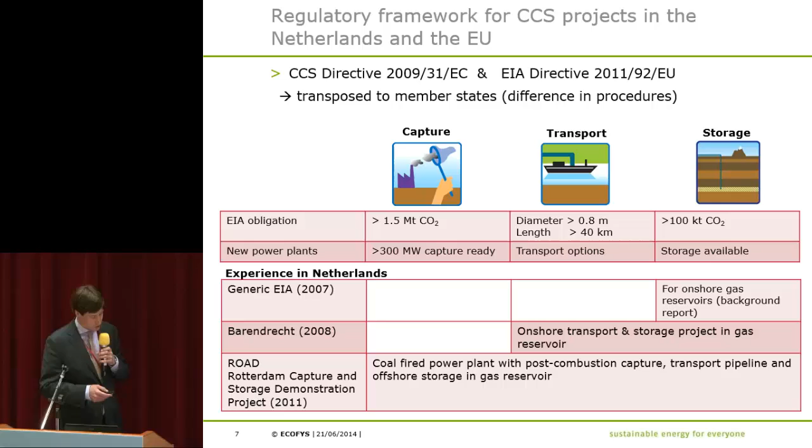And we have developed the ROAD project, which is still awaiting a final investment decision, hopefully by the end of this year, but probably it can also be later. And that will be a project storing CO2 coming from a coal-fired power plant into an offshore storage location. And for the whole chain, an environmental impact procedure has been done.

So this ROAD project, it's good to have a bit of insight there. It's a coal-fired power plant here in the Rotterdam area, which captures about 1 megaton of CO2 per year from a 1 gigawatt coal-fired power plant using post-combustion capture. Then it's transported by an offshore pipeline, mainly at pressures below 175 bars and below 80 degrees Celsius.

And it's storing it into an empty gas reservoir with a capacity of up to 35 megatons. The first reservoir that's going to be filled, if it goes ahead, is an 8 megaton reservoir, which is at 3,500 meters depth. An important thing to note is that the CO2 in the pipeline is being heated during transport, because when injecting into the empty gas reservoir, there's probably some phase transition due to the lower pressure in the bottom hole of the reservoir and the high pressure in the pipeline. So there can be extensive cooling effects during storage, so that's why the CO2 is being heated in the pipeline.

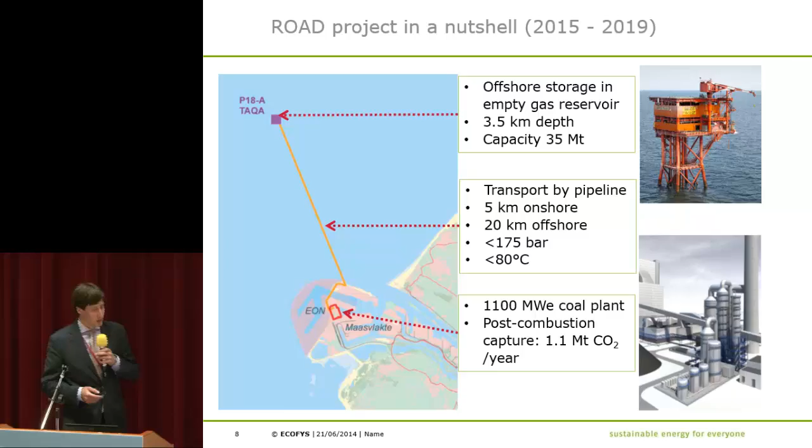So as I already told, for this project there has been a project EIA, so there has been an extensive environmental impact assessment for the project. But this project also triggered a strategic environmental assessment. And what it triggered for capture, in principle, was the location of choice. So in a strategic environmental assessment, they have to provide arguments why they have chosen the Rotterdam area to capture the CO2.

For transport, the thing that triggered the strategic environmental assessment was the fact that they crossed the dunes. In the Netherlands, that's really important, so they have to provide arguments why this happened and why this is the case, and what the best alternatives are. For storage, it was the location of choice that triggered this assessment. So when you put down a storage location in the Netherlands in a regional or spatial zoning plan, you will have to do a strategic environmental assessment.

And I also highlighted the green part here for the procedures. That is a new kind of procedure in the Netherlands, that they integrate the whole permitting process for these parts of the CCS chain. So to speed up the project, to speed up the permitting process, they integrated these parts into a one-stop permitting shop. That's how they call it in the Netherlands. And to align all the stakeholders from the governmental side, but also from the initiator side, to speed up the

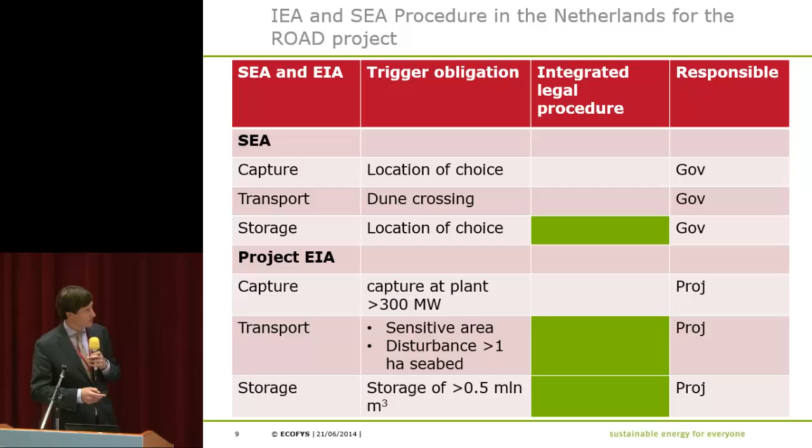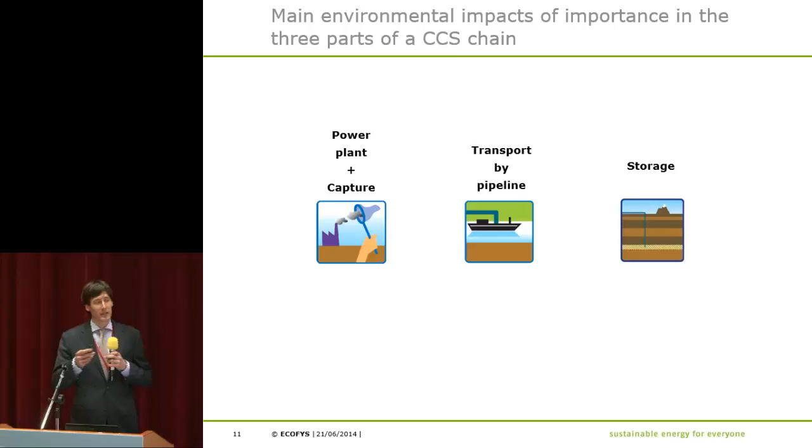So going a little bit from the regulatory side to more of the environmental impacts you could expect from the CCS project. We're going to highlight the first step of the chain. It doesn't mean that those are going to be showstoppers, but I just want to highlight what kind of important things should be worked on in your environmental impact assessment if you go to a CCS project.

So for instance, for power plants, I've reviewed environmental impact assessment procedures around the world for power plants, also for power plants with CCS. And you can see that a typical phase that is of importance for a CCS project is the operational phase. The most environmental impacts are in using the power plant, not in building the power plant or in demolishing the power plant. And that can be different compared to, for instance, transport and CO2 storage. So the focus is on the operational phase.

In the Netherlands, there's really a focus on emissions to air. Emissions to air are important, they should be balanced and minimized to the extent possible. And the environmental impact assessment should address how to optimize energy efficiency, use of waste heat, use of end-of-pipe emission control technologies like desulfurization or DeNOx, so reducing nitrogen oxide emissions, and how they deal with cooling water use and cooling water discharge. Those are the important aspects.

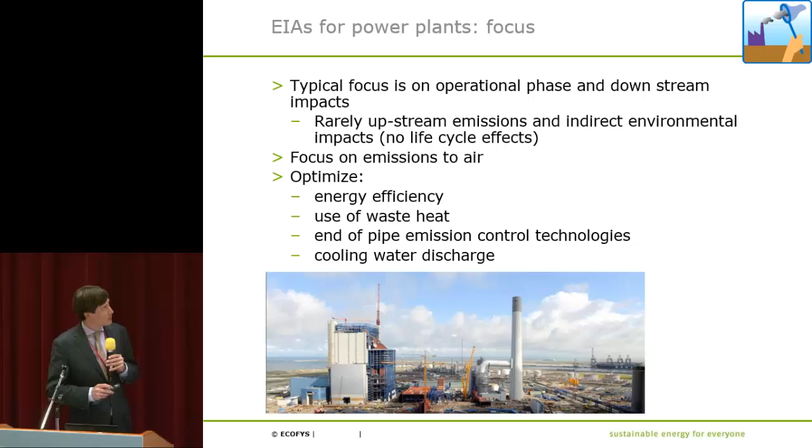So if you now look at a power plant with CO2 capture, how should we then address these items for a CCS project? Well, if you look at energy, for instance, we know that CO2 capture will cost energy, so your energy consumption per kilowatt hour of produced power goes up. So this is an important aspect to be covered in the

procedure. Emissions to air also are certainly affected by CO2 capture. Predominantly by post-combustion capture, you will reduce some emissions to the air, I will show in a later slide, but you also increase some other emissions per kilowatt hour to the air. So you have to balance what kind of level you want in terms of emissions to the air and find acceptable from a permitting perspective.

In terms of soil and water, the capture plant also uses water, so the water consumption is affected. Waste and byproduct formation is important. Certainly with post-combustion capture you will have waste formation due to the capture plant. And an important part of the environmental impact assessment should also address how you deal with this waste.

Resource consumption: next to primary energy you consume during capture of CO2, we also consume other resources like the solvent itself and other products you need to prepare the capture process. The thing not often addressed is also external safety, so storage of chemicals and, for instance, high purity oxygen if you go to oxyfuel firing. You should address that also in the environmental impact assessment.

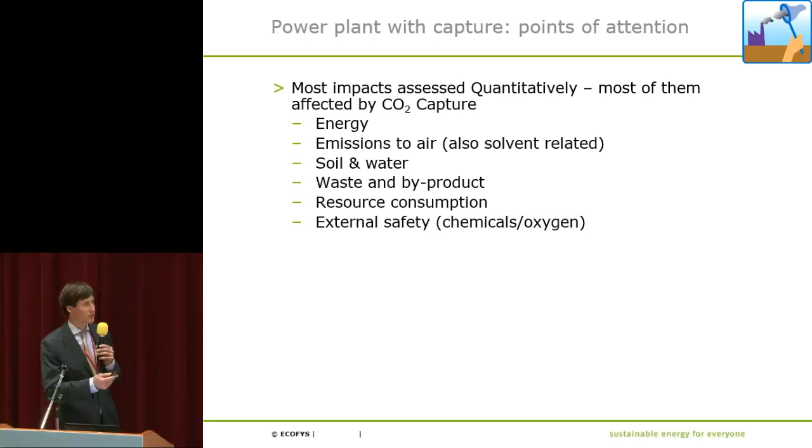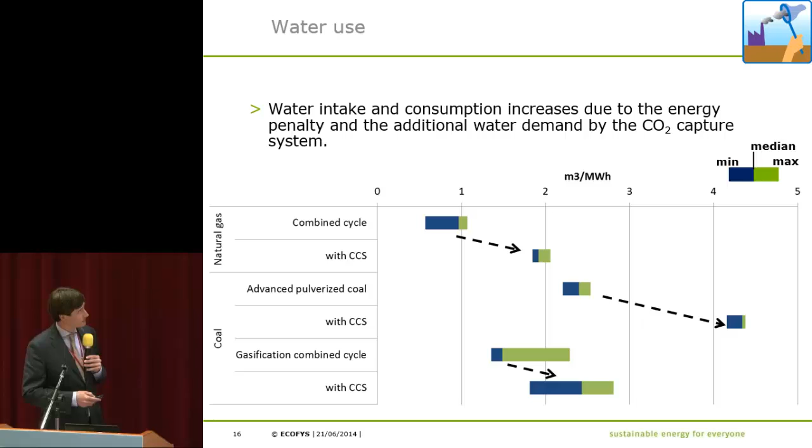So summarizing this in one slide is that primary energy per kilowatt hour goes up, CO2 goes down. Other emissions to air might be going up and down. It depends on how you arrange your flue gas cleaning and how you arrange the technology. It differs, for instance, between oxy-fuel firing and the gasification process.

Emissions to soil and water, that's really also difficult. It also goes up and down, but mostly you have more emissions going into your water streams, but obviously depending on how you equip your technology to clean that. Waste and byproduct often goes up, resource consumption goes up, and because of storing more chemicals on site, external safety is a bit affected.

One thing to mention for emissions to air, not in my previous slide, is that for post-combustion capture, the solvent emissions and solvent degradation products are also a point of attention that is being addressed in the Dutch environmental impact assessment. For instance, the Dutch had to adapt the legislation for emission of the solvent used there and set a level that was acceptable. So that's where also new legislation comes into play.

Summarizing it for the environmental impact assessment, we can say that the methods and tools used to measure the environmental impacts, but also to assess beforehand the environmental impacts, seem to be available. However, the exact emission profile, so whether the emissions go up and down and to what extent, is not yet known. So really monitoring is of essence, certainly with the demonstration and pilot plants.

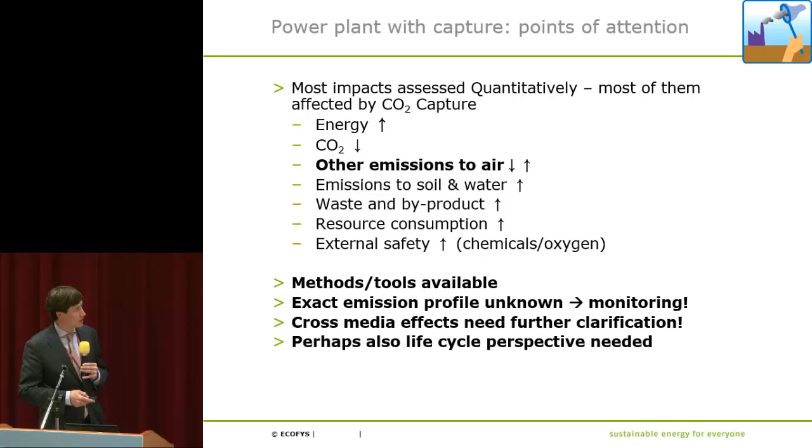And although not typically used in an environmental impact assessment, the life cycle perspective can provide some insights. So within the Dutch program, we've looked at the life cycle perspective for, in this case, a gas-fired power plant. And we looked at these stages of the whole life cycle, going from fuel extraction, in this case natural gas, to the storage of the CO2. And we looked at 18 environmental impact categories.

And from the literature, we know that for a certain environmental impact, there are certain environmental damage costs. So we applied damage costs to these environmental impacts. And then we calculated over the whole life cycle whether it would be a net benefit or not to equip the power plant with CCS.

In this case, you can see that the gas-fired power plant first had a damage cost of around 19 euros, about 750 Taiwanese dollars, and equipping it reduced it to about 13 euros. So overall, when looking at the whole life cycle, with this perspective, the environmental performance improved.

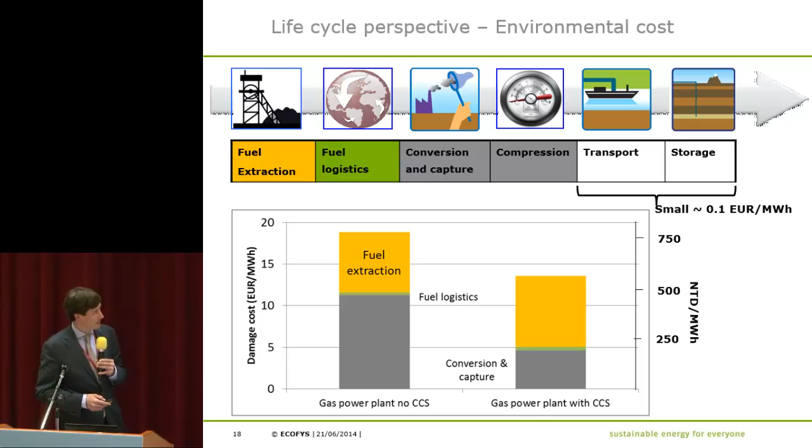Transport by pipeline, a whole different ballgame, whole different assessment area. Typically, the important parts of the environmental impacts from the transport pipeline are the construction and operational phase. Those are the phases where you have the most anticipated impacts. At least that's the focus of the environmental impact assessments I've reviewed.

Important environmental effects to take into account are disturbance of the soil and groundwater flows you have in a certain ecosystem. Contamination of the soil during construction, but also if you heat the pipes, there can be heating of the ground that may be adverse. Noise nuisance due to compressing the CO2 can be a small local effect, and risks due to pipeline failure.

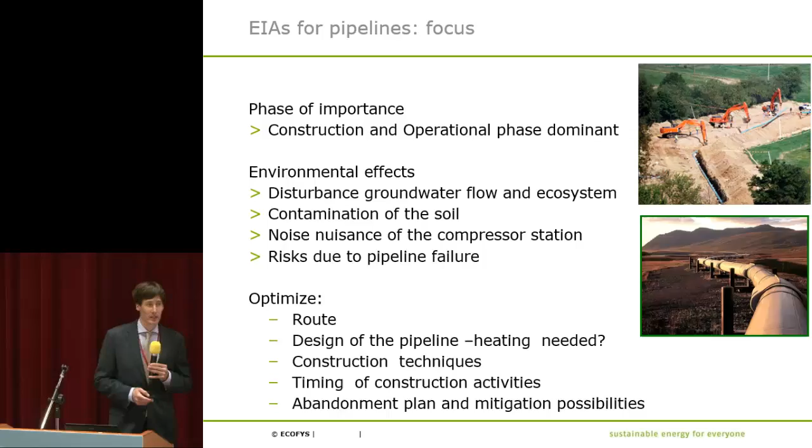And we'll go a little bit into depth in the next slide on that, because this was an important thing in the Netherlands. One of the fears of the Dutch people living near Barendrecht, that was the failed CO2 storage case, was actually the risk of the CO2 pipeline. They were afraid of the risks coming from CO2 storage, but also of the risk from the CO2 pipeline.

And what's important to know of the risk of CO2 pipelines is that there's a lot of research going on, predominantly in Europe, as far as I know, on getting the risk assessment models right. So understanding exactly, if a pipeline fails, what happens with the CO2? How does it disperse from the pipeline, and whether it can cause concentrations of CO2 that are dangerous to humans. So this is an important aspect that's being studied in Europe.

Another important aspect is impurities and safety. For instance, if you have H2S or other impurities in your pipeline, it can affect the risk. So the risk of the pipeline failing, but also these gases can be harmful for human beings.

What's found in literature is that the models used to calculate these risks are not uniform over the whole world. So it's important, when you analyze the risk of a CO2 pipeline, that you use an understandable and maybe conservative limit of adverse effect of CO2 exposure. So this is important when selecting the dose-effect relationship for CO2 risk assessment.

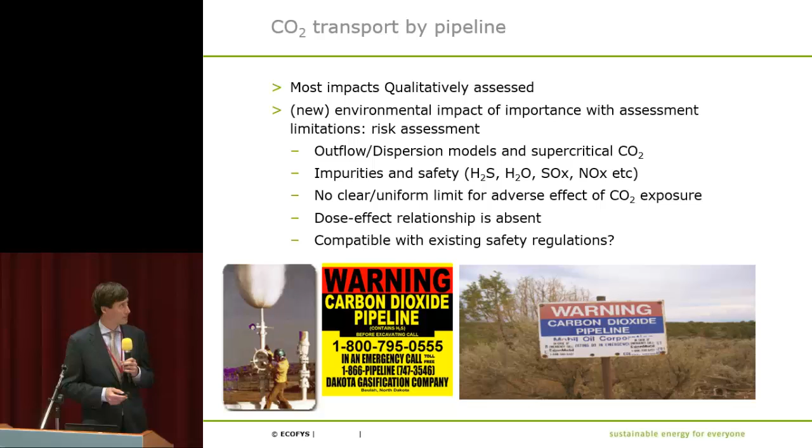Storage. So the last part of the presentation is also about the last part of where the CO2 ends, hopefully. And what I did for storage is that I looked at the environmental impact assessment procedure done for the ROAD project, so for the offshore storage of CO2, but also looked at analog environmental impact assessments for natural gas storage or waste storage.

And what is important to understand, and I think also to make clear to the public when doing the environmental impact assessment, is that for storage you have a distinction between the infrastructure that you have above ground, so maybe your installation from where you inject the CO2, and the underground system. Why is this important? Because often the engineered system, so all the pipes, the installations, those are engineered. The possible failure scenarios that lead to possible risks are known to the industry and can be estimated using existing models.

But for the underground, non-engineered system, the part where we maybe have a little bit less knowledge, so the whole deep underground and uncharacterized reservoirs, we have to approach it in a different way. And that's also what you see in the risk assessment done for those CO2 storage sites, at least for the Netherlands: they split between an engineered system, so the pipelines and installations, and a non-engineered system, so the CO2 storage reservoir.

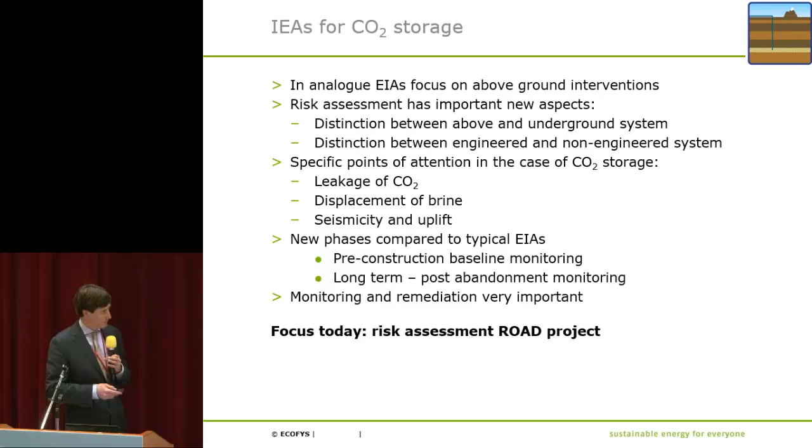And I also want to give you a brief insight into the risk assessment of CO2 storage that happened in the Netherlands. The risk assessment started with step one, which is the evaluation of possible storage reservoirs. Here it says that you have to have multiple locations, so which location is best. Actually, in this case, the offshore storage location was the only one left relevant for this project, so there was not really a step in this assessment. So it's important to consider whether you want to embed such an approach for Taiwan.

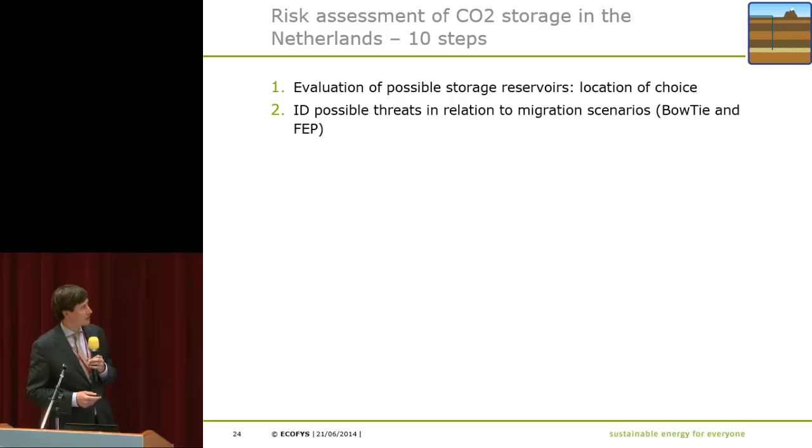Then the second step is that together with a group of experts, we try to identify what can go wrong with the storage site. So possible threats that can happen that will end up in what they call the event of CO2 migration. So they identified certain threats that can lead to the event of CO2 migration, and they try to estimate what kind of consequences that would mean for the ecosystem, but also for human beings in terms of risks.

They also then assess for this storage location what kind of barriers are there in place or can be put in place to reduce those threats leading to an event, or in the case of an event, that there are some remediation actions or mitigation actions that reduce the consequence of this leakage. And for those threats, the assessment of what can happen with a certain storage site, they use what they call features, events, and processes databases, a couple of which are being used worldwide.

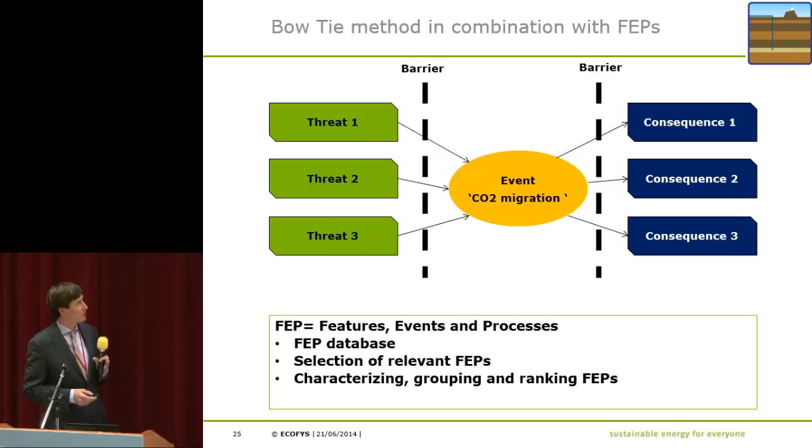So with this semi-quantitative assessment of scenarios that can go wrong, they started a whole puzzle, a set of studies, including reservoir geology, a reservoir study to model flows in the reservoir. They also did some geochemical modeling, looked at the integrity of the cap rock and possible faults in this reservoir. They looked at the wells. Are they good enough to prevent migration of CO2? And they did a migration path study for this site.

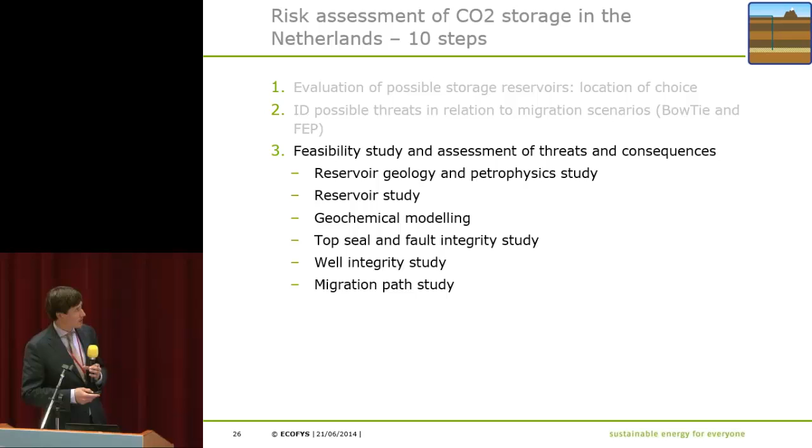So with the possible threats, and also with the detailed characterization of the storage site, they found that the most important scenarios, what could go wrong and what should be assessed in more detail, are migration through the cap rock, so that's the overlying rock that seals the reservoir and holds the CO2. Migration via a spill point, so that it leaks outside of the reservoir. Migration via a fault in the underground, or migration via a well. So those four scenarios were assessed in more detail.

And what they did then is they identified what kind of mitigation measures, or actually types of monitoring, should be applied so that we can measure whether these scenarios are occurring, yes or no. So it's really important which kind of monitoring is in place to measure whether we should do something. And in this project, there's a whole set of monitoring technologies being proposed. The most important ones are the seismic baseline study. So they run seismics to see what happens with the CO2 plume.

They constantly measure the temperature and composition of what goes into the ground to measure if there's a change in that. They always make sure that the reservoir pressure is lower than the initial reservoir pressure. In this case it was about 340 bar when the reservoir still held natural gas. So the limit of this particular reservoir is that the pressure of CO2 should always be below that 340 bar. Another calculation is a mass balance, to see whether the amount of CO2 you see in the reservoir is the same amount as you have injected.

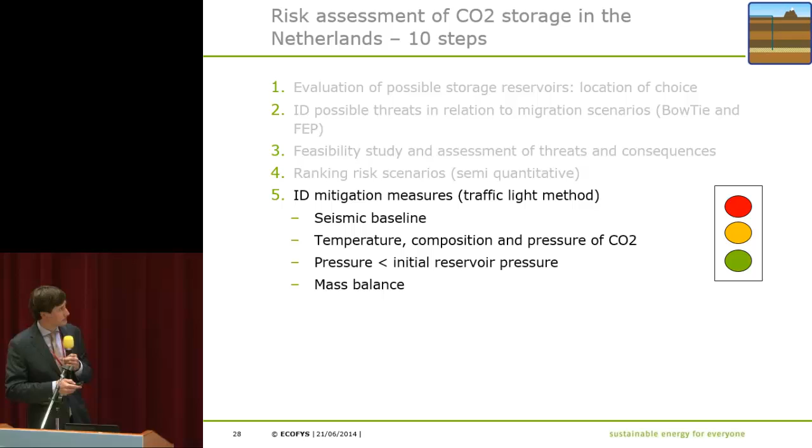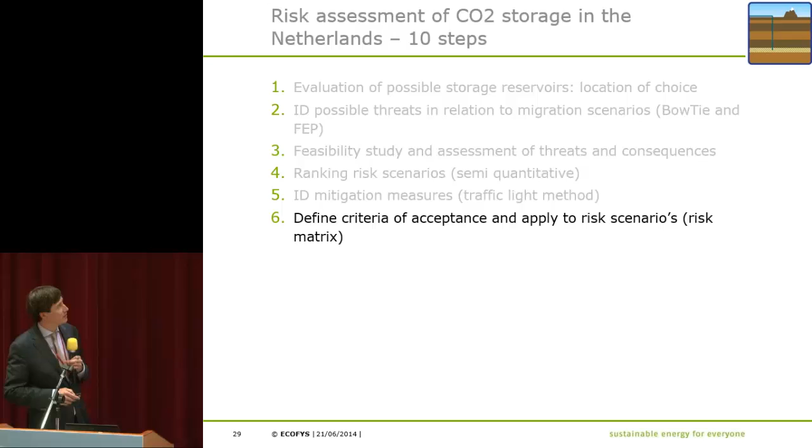So next to understanding what kind of scenarios can happen, it's also good to define what kind of risks we actually accept as society to develop CCS. And that's why they developed the risk matrix in this project. They always looked at the consequence, so what actually is the impact of a risk scenario occurring, and at the probability. And they try to plot certain scenarios or occurrences into this risk matrix.

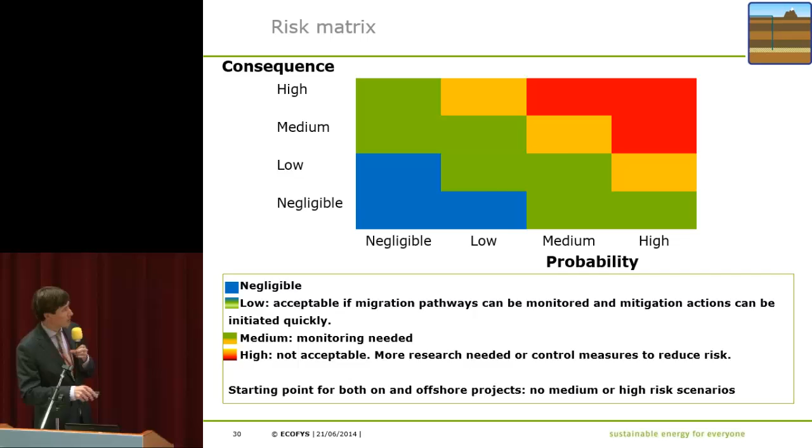And if you remember the four scenarios that were of importance in this ROAD project, they thought it was migration through cap rock, migration via a spill point, and via fault. The experts in this project all assessed this as a really low chance of occurring, so the probability is really low. And if it would occur, then the impact would also be very low. And you can see here the blue area is what would be accepted in this particular project.

They found a challenge for the existing wells in this project. There were already existing gas production wells in this reservoir, and they found that CO2 migration via these wells could happen. So they could not exclude this occurrence. And if it would occur, there could be a possibility that CO2 leaks upward and comes into layers above the reservoir. So they did additional studies and they suggested, for instance, a workover of the well or other remediation options to reduce this risk from the medium and low combination to a negligible risk. And they communicated this to the stakeholders, which as far as I know was well accepted.

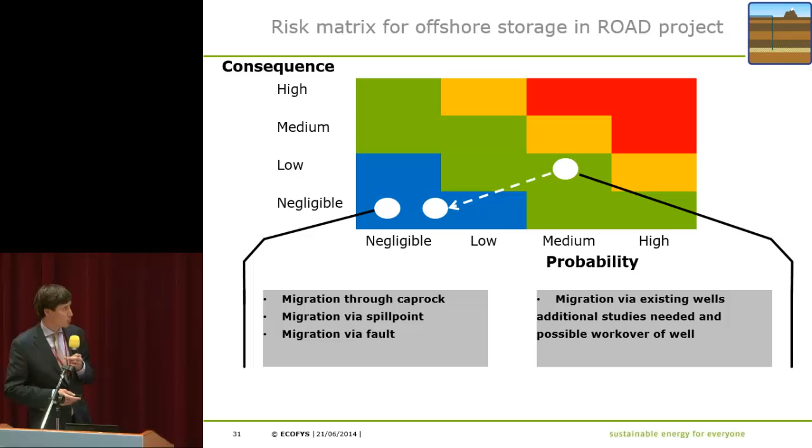So having defined the risk acceptance criteria, it's then important to have a risk management plan, where you look into the design, operational phase, closure, and also long-term management and monitoring of the storage site. I addressed already some monitoring technologies, but basically you monitor the injection process, the wells, the integrity of the reservoir, plume tracking, and CO2 migration out of the reservoirs. Those are the most important goals of monitoring in CO2 storage. And the techniques being used in this offshore activity were seismics, well logging, sampling, pressure monitoring, and various other tools are being suggested.

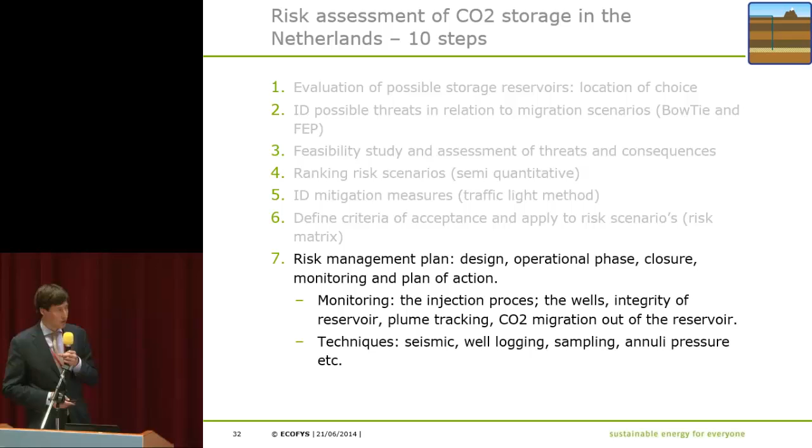But you have to be aware that as this is not yet an ongoing project, it's also foreseen that these monitoring results and risk scenarios may change when the knowledge of a certain reservoir increases. So feedback from monitoring results back into the risk scenarios, and then refining the monitoring plan, should be a continuous improvement cycle for risk assessment. And then finally, how to communicate those risks with stakeholders and also the general public is an important part of what you do in an environmental impact assessment.

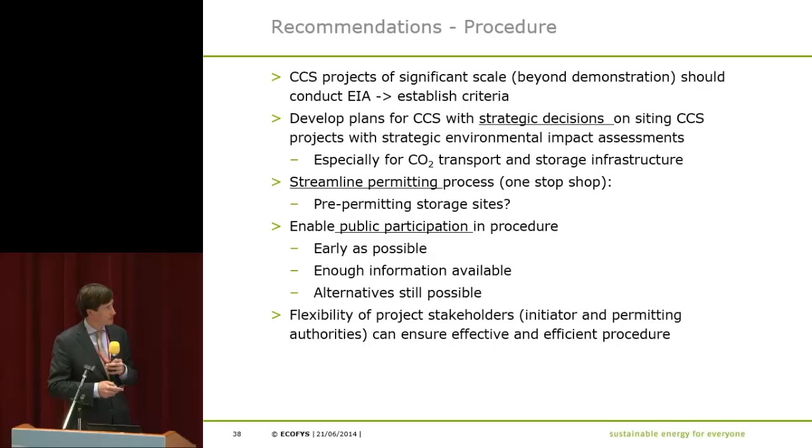And actually, the key message to take home, you can read it.